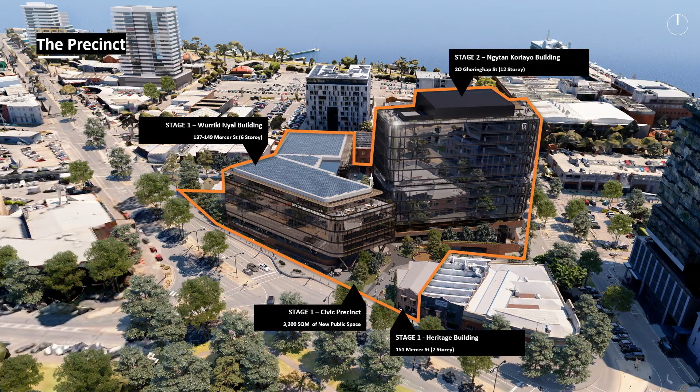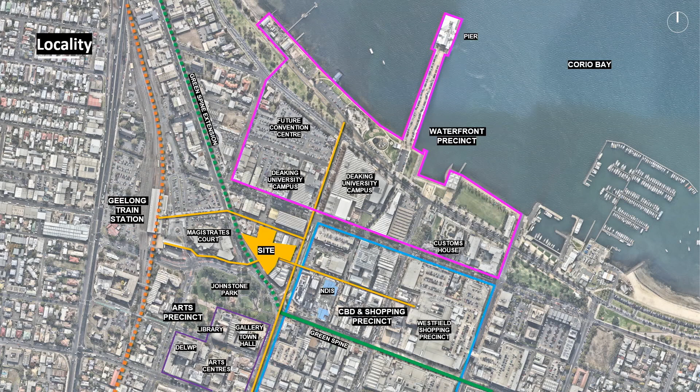The site is central to Geelong and essentially stitches the main train station with the northern waterfront precinct, the eastern CBD and shopping precinct, and the southern arts precinct.

The site has an awkward geometry both in plan and in section, with 137 to 149 being the original competition site, with the developer purchasing 4, 6 and 8 to increase the public offering and open the site up to the north, as well as 151.

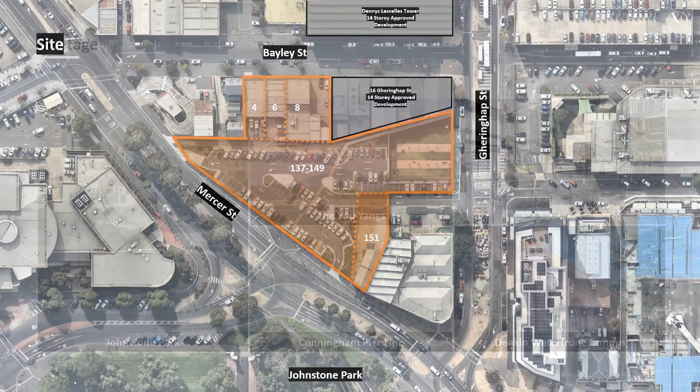Geelong has a rich cultural heritage which we were able to reference through the design, informing principles such as creating a new civic space for Geelong, amalgamating 7 council offices into 1 workplace, employing best practice sustainability befitting Australia's only UNESCO City of Design, integrating Aboriginal art and culture, and investing in the new mass timber industry.

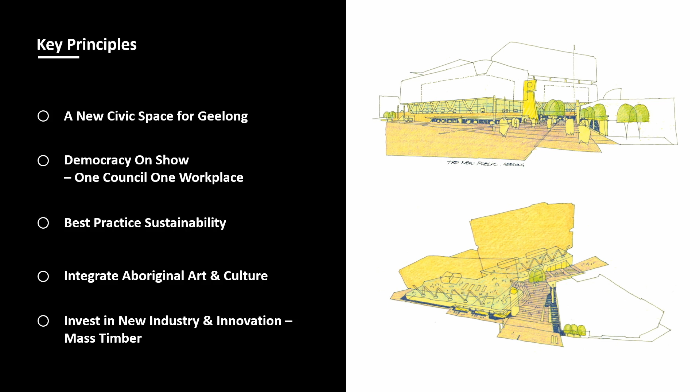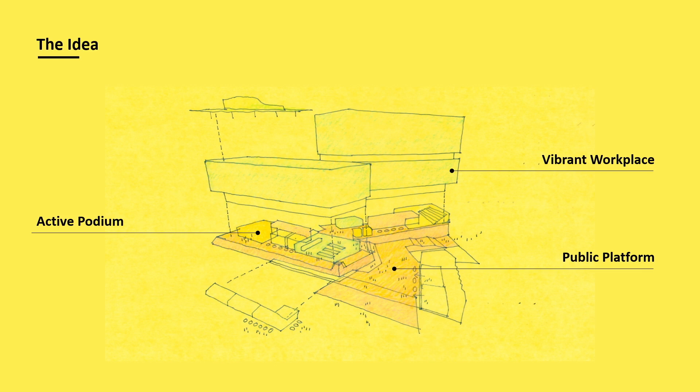The design idea is simple: establish a public platform accessible to all, activate that with an active podium that hosts events, and place the vibrant workplace atop.

It is a staged master plan with stage 1 now complete. We see the establishment of the heritage building, the public landscape, and Wurriki Nyal, with stage 2, the 12-storey commercial building, set for 2024.

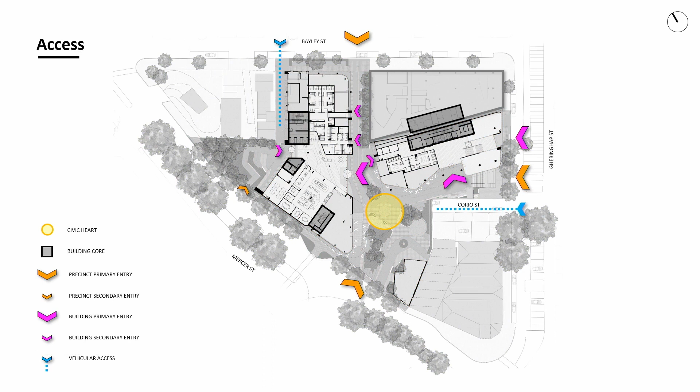The site is very permeable with multiple access points to both the site and the buildings, with vehicular and pedestrian movements completely separated.

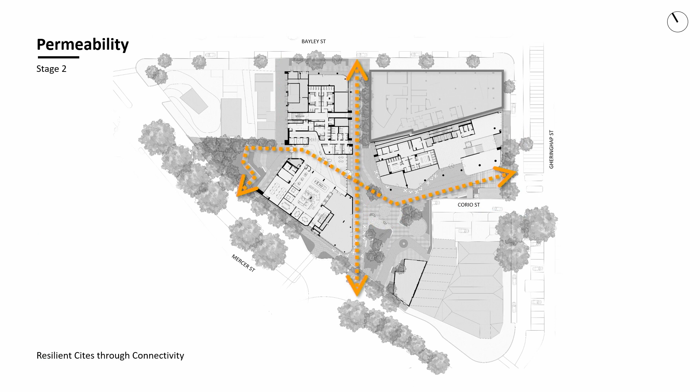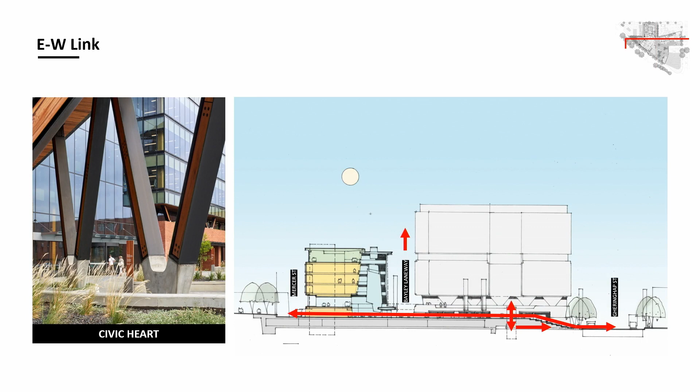Continuing with permeability, we have north, south and east-west access through the site. We have connection from Bayley Street through Mercer Street with a newly established Bayley Laneway, and a connection from Gheringhap Street through to the Civic Heart through Wurriki Nyal and over to Mercer Street.

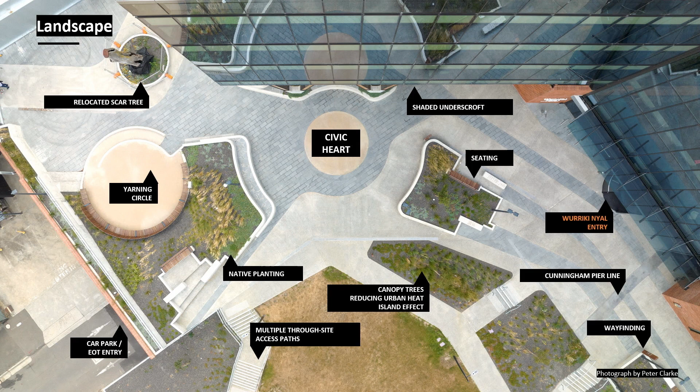The landscape has some notable features, including a relocated scar tree, a yarning circle, native planting selected by the traditional owners, canopy trees to reduce urban heat island effect, and shaded undercroft areas.

Focusing on the Wurriki Nyal building, it's best understood in 3 segments: the public ground floor, the invited public realm podium, and the private offices above, with level 2 being the expansion office floor for the future council offices.

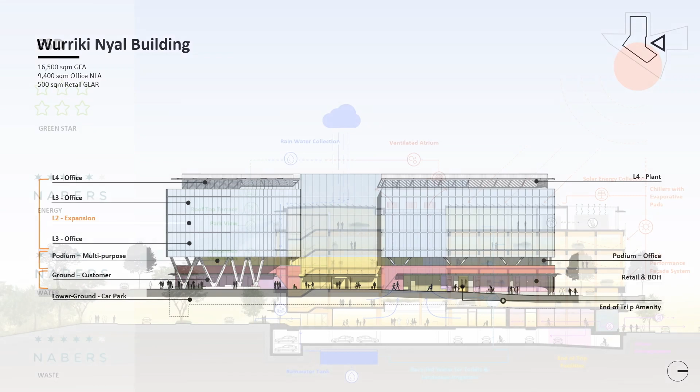It's a 6-star Green Star building with excellent NABERS ratings for energy, water and waste. We have solar energy collection and rainwater collection that is recycled throughout the building's operation.

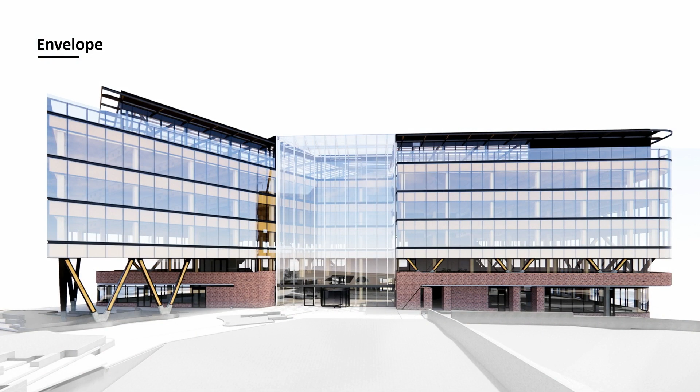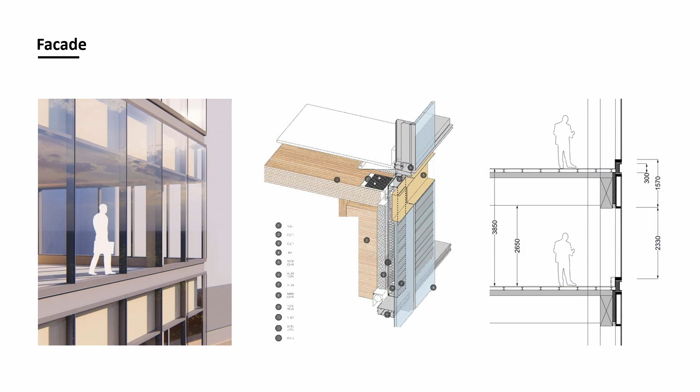We have a brick masonry podium material for the base, referencing the brick heritage buildings in Geelong, and then a high performance thermally broken double skin facade wrapping around the building.

Revealing the skin, we see its hybrid structure with concrete ground and podium level, mass timber construction up to level 4, and a lightweight steel frame above that.

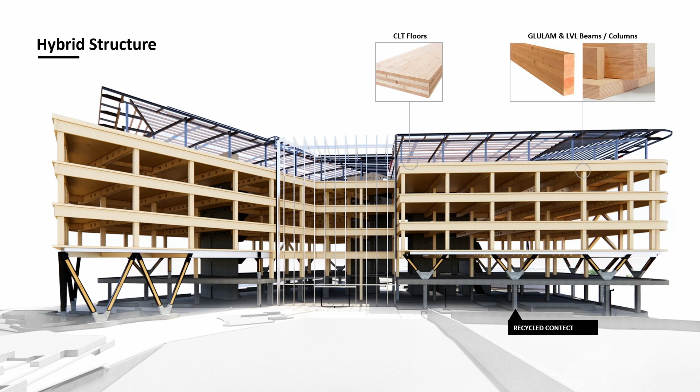Using timber, it's not only a sustainable and renewable material, it also saved about 32% of the embodied emissions in hot spot materials. Here we can see the glass over the hybrid structure.

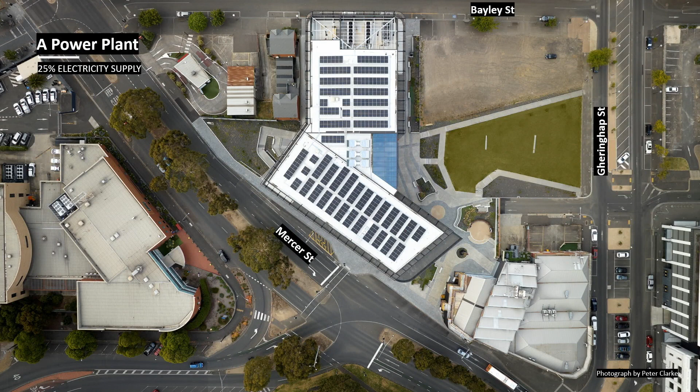The large flat roof allows for a 140 kilowatt solar panel array, which provides about 25% of the building's energy usage.

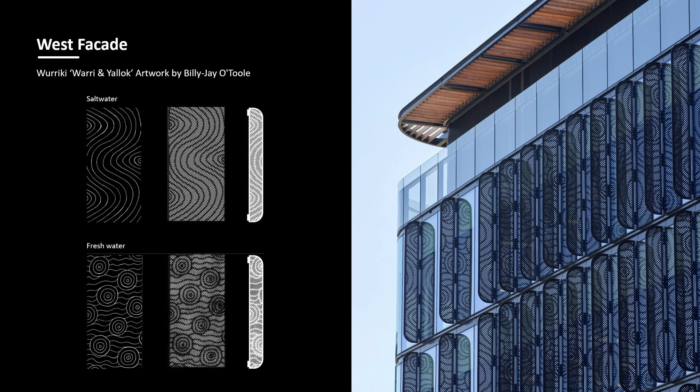One of the key aspects of this project is the 3 different street frontages. We've got the southeast Mercer Street entry, and the southwest Mercer Street arrival as you drive into Geelong, which features perforated shade fins with this Aboriginal artwork.

Then we have the northern Bayley Street that leads through to the new Bayley Laneway, and Gheringhap Street, which leads up to the Civic Heart and into the main Wurriki Nyal foyer. Stepping inside, we continue that connection with country through the colour scheme chosen by the traditional owners.

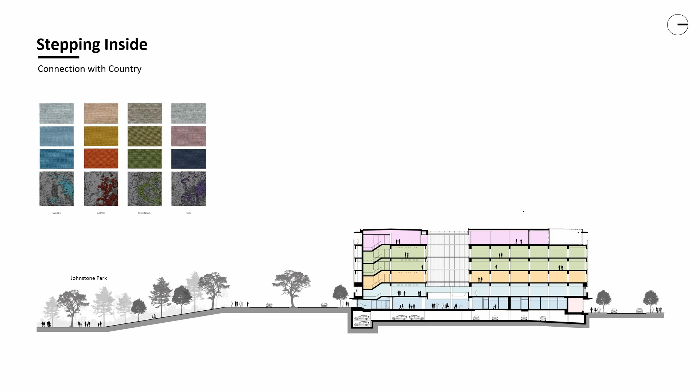Underneath the public podium, we have a car park with EOT and plant facilities, and we move up to ground floor on the public realm, home to the 6-storey atrium which invites you into the space.

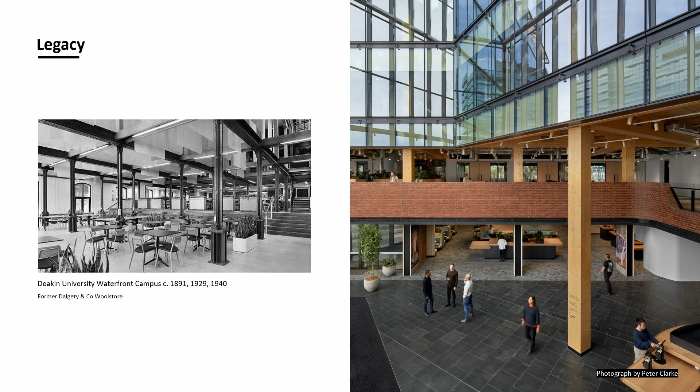This references the old industrial Deakin Waterfront campus buildings with the exposed structure, really an attempt to dematerialise the building.

Ground floor is home to the Customer Service Centre, which provides a multitude of different meeting spaces to meet with council, not just formal meeting rooms, but informally as well. Then we have the foyer, accessible off the main atrium, that leads up to the levels above.

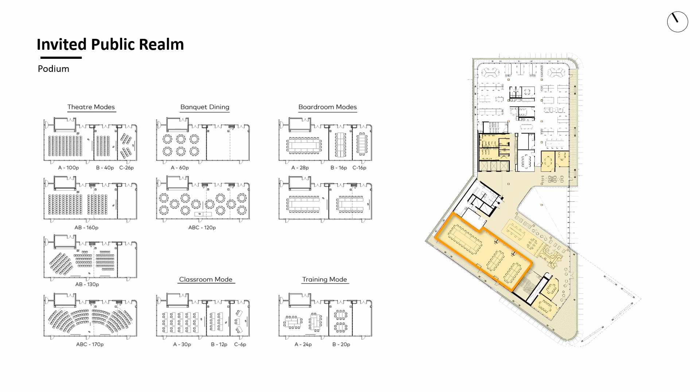We move up to the invited public realm on podium level, home to a large multi-purpose space to hold events, with an informal foyer that looks down and continues that connection through to the public realm below.

Moving to the workplace, we have typical work floors on levels 1 and 3, with workstations set around the perimeter of the building, maximising access to natural light, and meeting rooms and cores positioned on the west to reduce the heat load on the building.

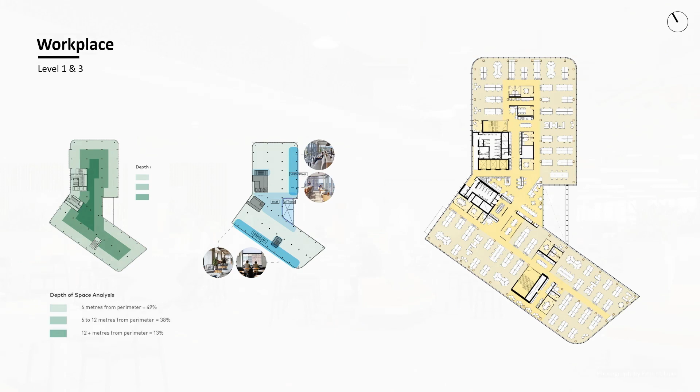A central hub connects the north and south zones of the buildings, each with its own kitchen point. All the office space is open work floors with views out to the neighbouring Johnstone Park and also city beyond, with breakout areas in between so you can connect with the community.

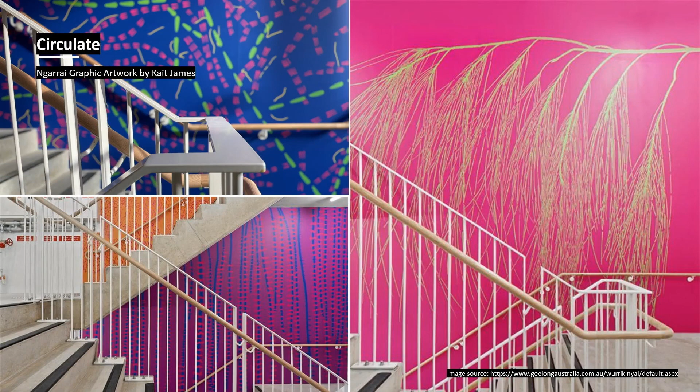We have a meeting room pod sitting underneath the structure, featuring another Aboriginal artwork by Kait James, also featured in the circulation stairs that connect ground to level 4.

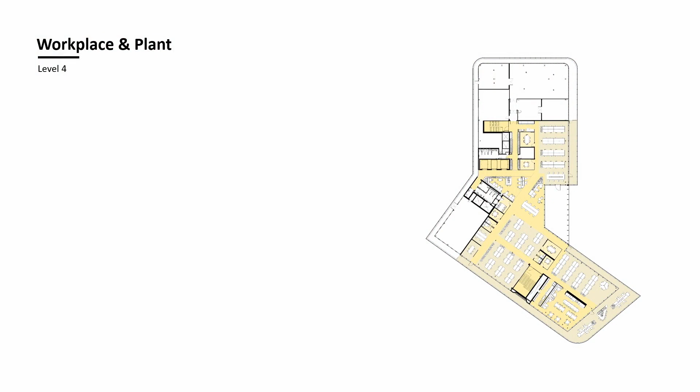Moving up to level 4, it's a combination of both plant and office floors, continuing that timber aesthetic and exposed structural steel, with this large informal dining space that looks over the greater city of Geelong.